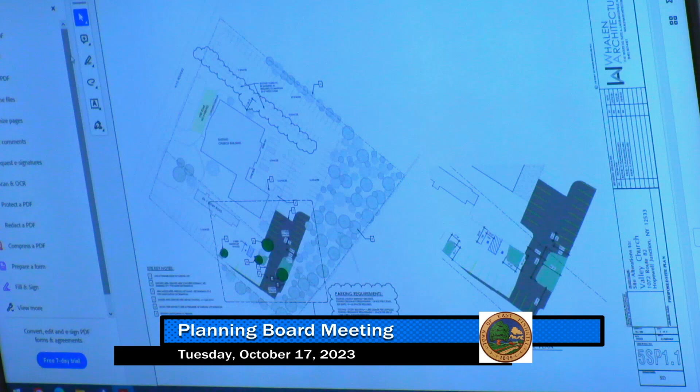While you're looking for things, I'd like to remind the board that at the last meeting we passed a motion to exercise our discretion to waive any requirements with regards to the front yard setback unless determined by counsel that that was inappropriate. Counsel actually determined it was appropriate, so this particular project does not need to go to the zoning board. There are no other issues to deal with on that. Thank you.

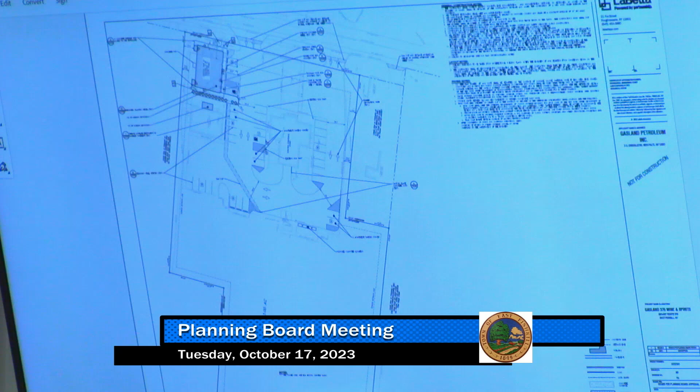That's pretty much where we are now. As I mentioned, some of the items we're still working to address, such as the lighting, and we'll be providing that in the next submission package.

At the last meeting, you guys declared your intent to be lead agency, and the applicant circulated, but it hasn't been quite 30 days yet, so I think we'll hold off until the next meeting before we declare lead agency. I believe you were referred to the ARC at the last meeting, so you've got an upcoming meeting on November 2nd. I don't think a submission has been made.

I've spoken with the architect who is preparing for that meeting and has submitted, or will be submitting, for the one after. I think that's due next week or the following week. So you should circle back with the planning office and speak with Jeannie Burke, and she'll give you the dates and the requirements for that meeting.

Thank you. And since it was not circulated, at this time the public hearing for the Architectural Review Council is done through us. So you'll be providing us with elevations and renderings at the next meeting. You need to bring those to the next meeting.

Yes. Okay, where are you with the health department with regard to septic? The septic had been previously approved for this expansion. The project had gotten a building approval and a health department approval to put apartments above the existing convenience store. At the time of that approval, they had designed it with the capacity for potential development of the liquor store, the proposed liquor store building. So as far as the sizing of the system, it is adequately sized.

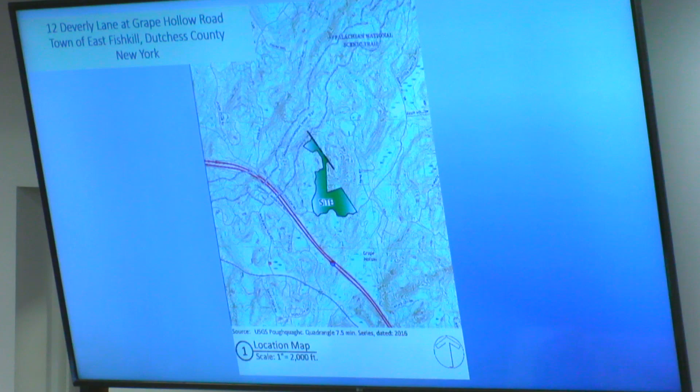Last time we were here was January 17th for the sketch plan review, and just to recap, the property is located off Grape Hollow Road. It is situated in the East of Hudson watershed.

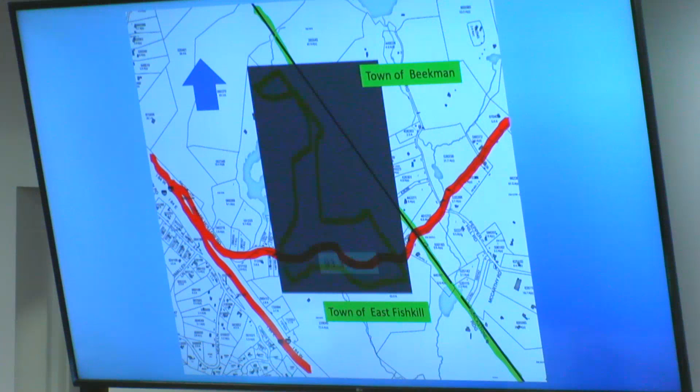The boundary line between town of Beekman and town of East Fishkill is adjacent to the property, and the red line represents Grape Hollow Road, which is a local road. And this line is I-84. The lot area is 93.3 acres.

The applicant owns properties surrounding the property. One is in town of East Fishkill, 19 acres, and 2 of them are in Beekman, almost 42 acres and 1.4 acre.

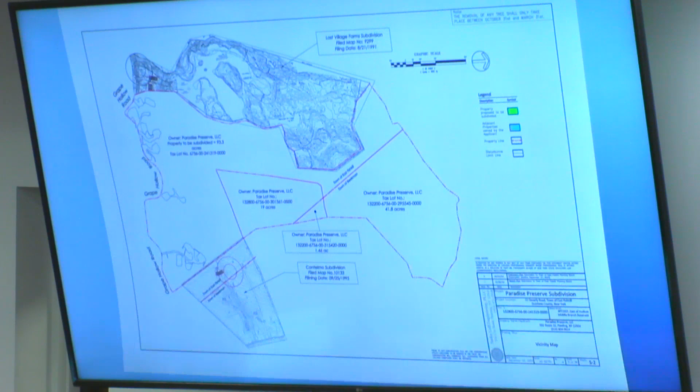So the property which is to be subdivided is shown in green, and the property also owned by the owner is in blue. The property is surrounded by 2 subdivisions. One, I believe, is partially constructed - that's the Contelmo subdivision - and the other one, I believe, is not fully built - that's the Lost Village Farms subdivision.

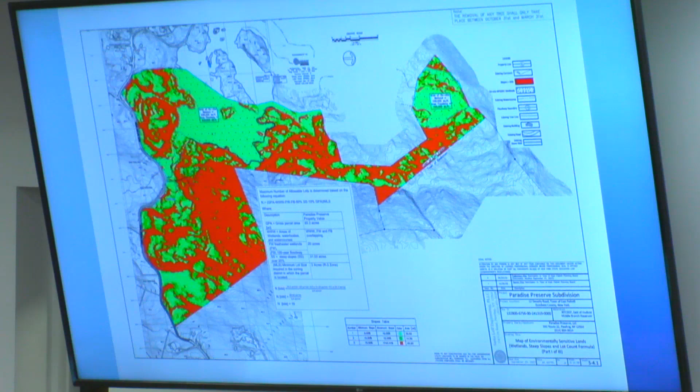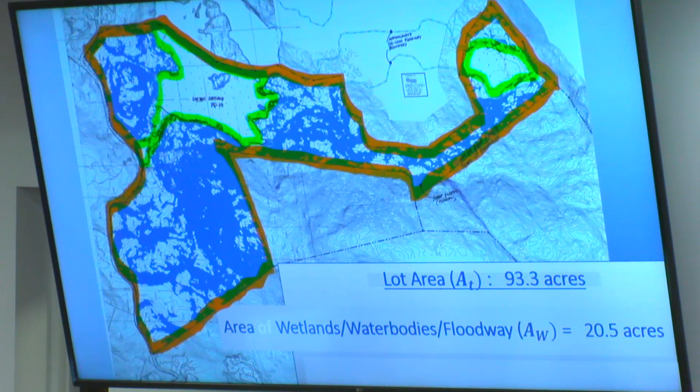We have wetlands, floodways, water bodies overlapping each other, which is about 20.5 acres. Steep slopes are 31 acres.

And based on the formula which is listed in the town code for computing number of lots, the formula yields 16 theoretical lots, which is more than the six lots being proposed.

The property is zoned R3 residential, and this is from the zoning map, town of East Fishkill.

The property use history was obtained from the town of East Fishkill property cards, and the codes were obtained from the assessment manuals.

So prior to 1986, it was listed as camps, cottages, bungalows, seasonal residences, one-family year-round residence, and current property use is residential multi-purpose, multi-structure property.

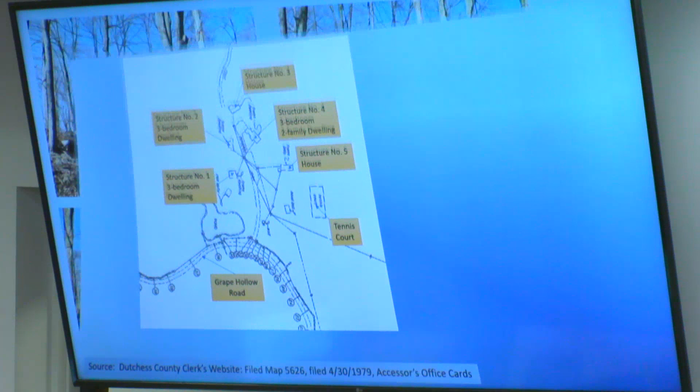Those buildings were built in the late 1930s, early 1940s, and they do not have any historical value.

I know last time you asked me about that, and since we got a letter from the Office of Historic Preservation, I know there is floating thinking that this used to be a Girl Scout camp, but I was unable to find anything regarding that, and went back to the late 1800s for ownership, and it was always owned by individuals, or there was some company, Kingston Holdings, but I don't know what.

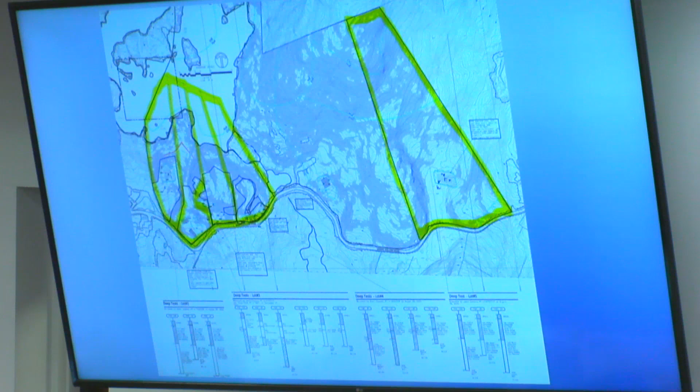So the subdivision is into 6 lots. We have the part which kind of governs the subdivision - the availability of area for subsurface disposal systems.

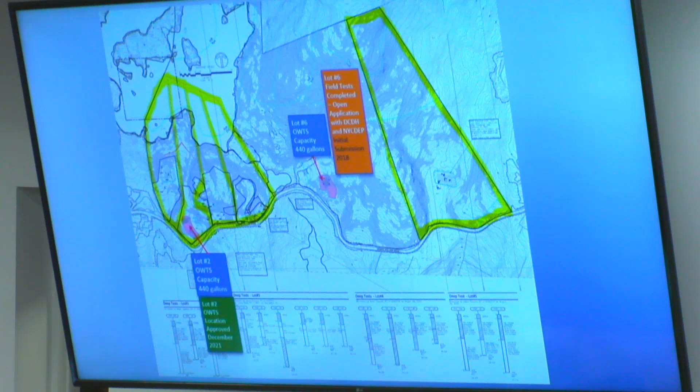In 2021, the owner obtained a permit for a septic system for 440 gallons, which happens to fall on lot number 2. And in 2018, there was an application submitted to the health department for also a 440 gallon system, which falls now on lot number 6.

Then we have lot number 5, where the design capacity is 550 gallons. And the plans for the subdivision, basically the same plans we submitted to you, were sent to the Dutchess County Health Department.

Then we have lot number 4, which has capacity also 440 gallons. Lot number 1, 330 gallons capacity. And lot number 3, 220 gallons capacity.

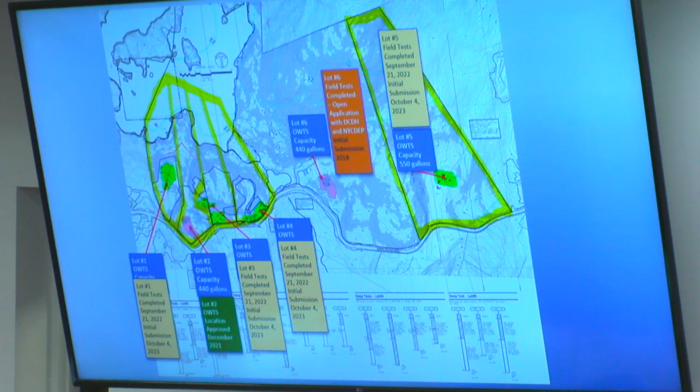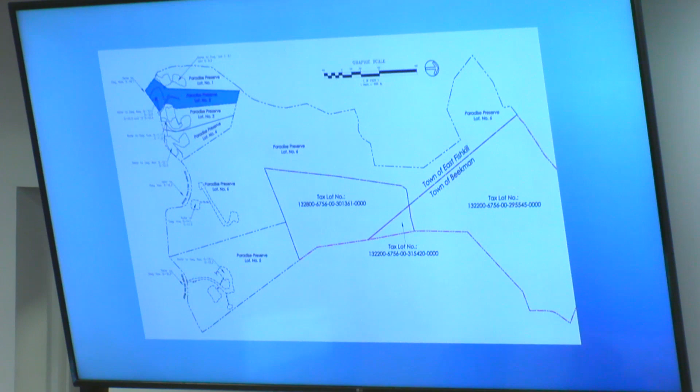For lot number 2, the driveway length is 120 feet. That's - I'm pointing that out for the fire department comments that any driveway over 1,000 feet has to have a pull over.

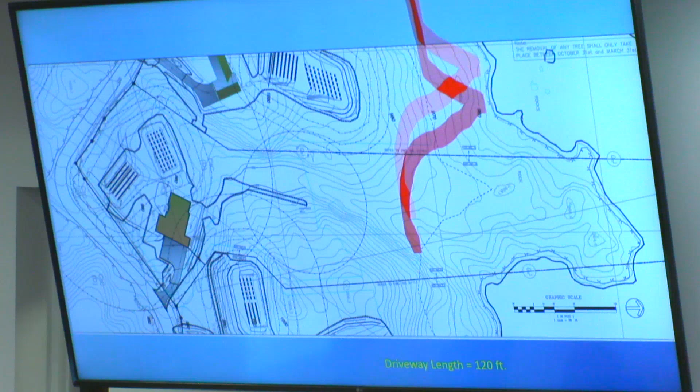Again, we are away from the 100-foot wetland buffer.

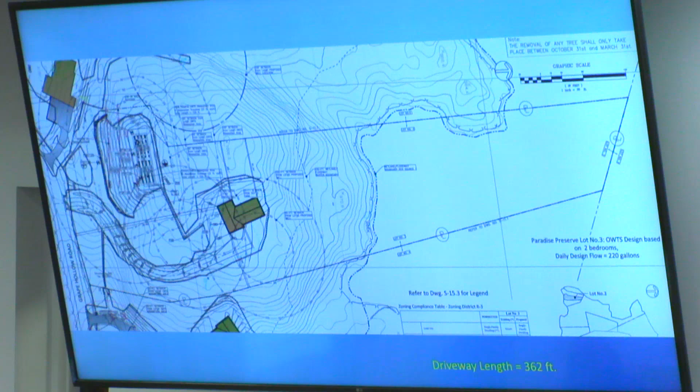This one is lot number 3. Driveway length is 362 feet. And again, this is the 100-foot wetland buffer area.

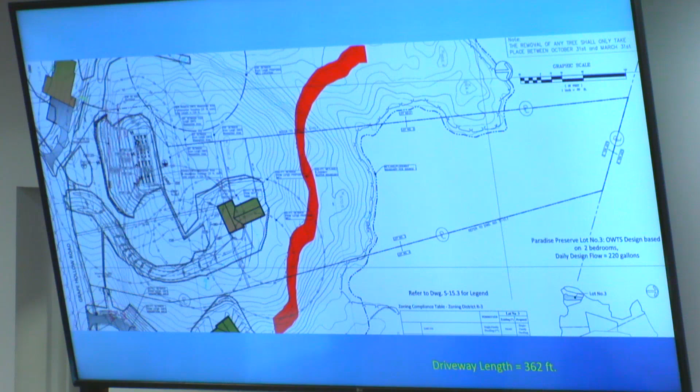The wetland portion of the wetland was delineated by wetland scientist, Mr. Kozlowski, because we were concerned about the proximity at this area. So he put the flags on the edge of the wetland, and that was surveyed by the surveyor, field survey.

You have lot number 5. This is where the driveway is exceeding the 1,000 feet. Initially thought that the pull over area would be as highlighted in green, but if it's supposed to be by half distance, then it would be somewhere where the blue circle is.

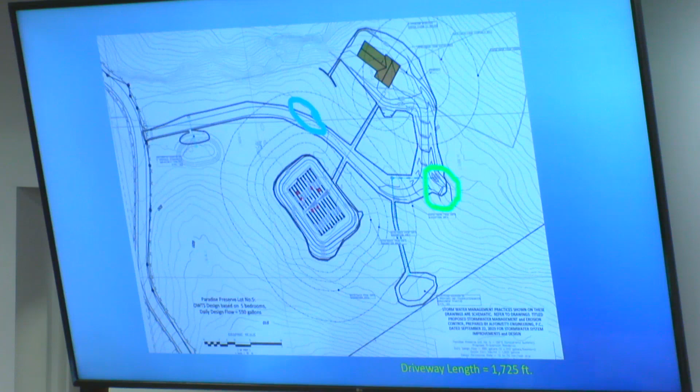And the last is lot number 6. That's the largest lot, around 61 acres. And this is the proposed development. The 100-foot buffer appears to skim over the existing driveway or its lane.

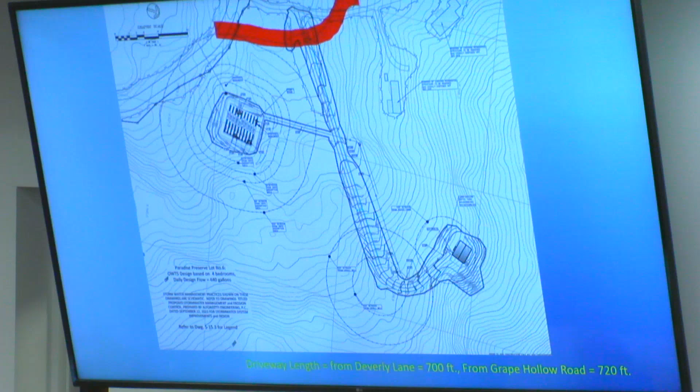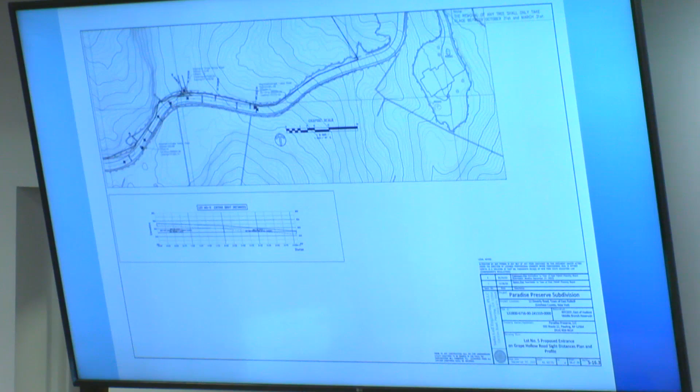We look at the sight distances for the proposed driveways. So we created the plan and profile showing how the sight distances were determined, and actually we met in the field with the highway superintendent — I'm sorry, I forgot your name. Yes, we met at the property to look at a couple of the driveways.

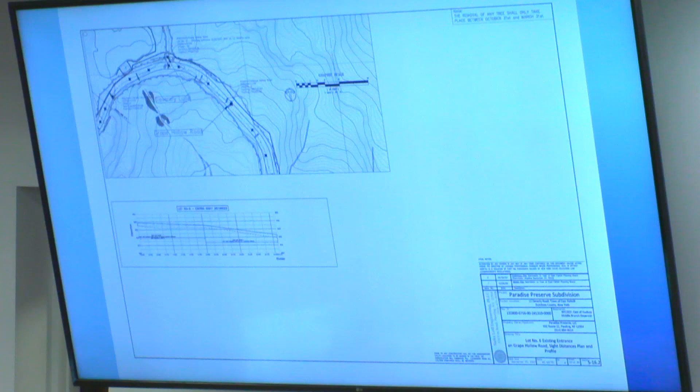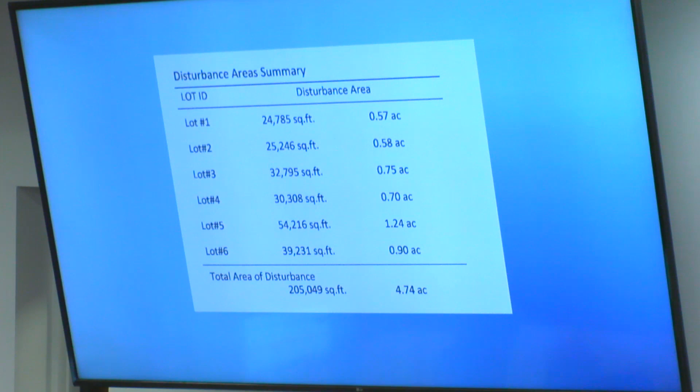We have area based on the plans which were presented. We determined the area of disturbance of each lot and combined the total to be 4.74 acres. I understand there is a concern that may exceed 5 acres if we do some improvements — maybe the pullover or whatever will kick it over 5 acres — and we will take a look at it, and if necessary we would address the condition of the total area disturbance being 5 acres.

This light green line represents a ridge line where the stormwater runoff from Lot 5 would be directed to Stump Pond stream, and stormwater runoff from Lots 1, 2, 3, and 4, which is about in this area, would continue going to PQ 23. Lot number 6 runoff is split between going towards PQ 23 and PQ 22.

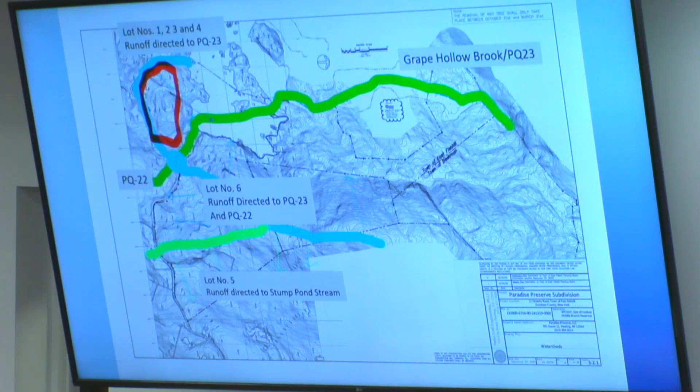And with that, the stormwater management and erosion control — Lauren Brennan of Alfonsetti Engineering will guide you through that. Thank you very much. Thank you.

Hi, good evening, I'm Lauren from Alfonsetti Engineering. I'm here to answer any questions regarding the stormwater design for the proposed subdivision. I just want to say that when we submitted, we only included a stormwater report for Lot 5, which was over an acre disturbance. Our thought process was that each lot is going to be developed separately, but as the engineer pointed out, the overall disturbance is going to be around 5 acres, so we're going to have to speak with the client to see what our next options are to try to keep that under 5 acres disturbance.

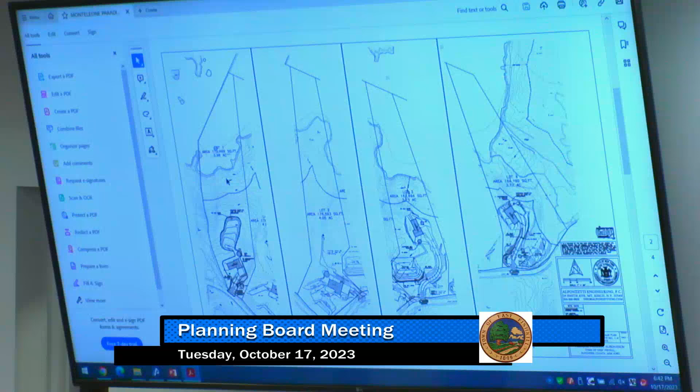And there's additional requirements in the East of Hudson — it requires enhanced phosphorus removal. It's a difference in the calculations, but essentially all of the lots are going to be required to be treated in some fashion in order to comply with the Phase 2 regulations for DEC. Also, they had provided a letter from DEP dated earlier this year, referencing a plan depicting less than 5 acres disturbance. Now, whether it's 4.9 or 5.1, I don't know what the DEP requires if it exceeds 5 acres, but that letter may need to be revisited once they revise their plans and address all the additional requirements.

And we had a number of comments regarding driveways, things like that. Several of the lots appear to have drainage piping going from one lot to the next. We try to keep it in the same lot, but I think for lot 1 and 2, there's a pond that's very close to the lot line — Yeah, Lot 1 is piped across to Lot 2, and 3 goes to 4. All of those are going to require some form of easement or a stormwater management district to handle all that.

So I just wanted to bring that to the board's attention. Being in the East Hudson watershed, it's a whole new ballgame in terms of the minimum requirements. Normally, if you exceed 1 acre, you have to get coverage under the permit. If you exceed 5 acres, you have to do a full SWPPP, or if it's commercial. Here, the threshold is a lot lower, and every lot will need some form of treatment to meet the requirements. Got it. Thank you.

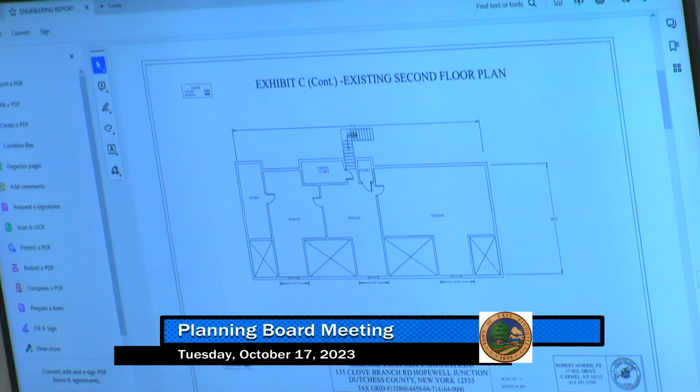Good evening everybody, my name is Camille Niles, I am with Sallard Property Group. I am looking to convert my storage space on my whole second floor at 135 Clove Branch Road into office space, looking to have a site plan amendment. With that, I know I would need to upgrade my parking, so I have a proposed site plan revision for my parking lot. Right now I have 27 spaces, 2 of which are handicap and 1 which is van accessible, and I know I'm going to need to provide 4 handicap spaces with 1 van accessible.

So my current tenant, ABC Speech Therapy, is in need of additional space. As of now, I'm in talks with them for the upstairs. So as you can see right now, the layout I have for the existing floor plan, it's just storage space. There's stairs in the back to go up, and there's a back entrance, which I'll show you in a moment.

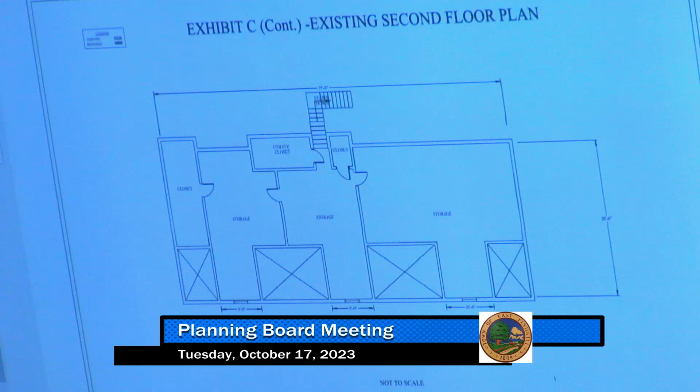So basically, I'd like to be able to rent it out, whether it's to them or to another office-type business. Their type of business would be the worst-case scenario, to make sure that I have sufficient parking. So that's why I'm using them as a business model. If they choose to take it, this would be the worst-case scenario, as in the amount of therapists and clients and stuff like that.

So I figured I'd just go through with it, see where it takes. If they don't take it, it would be on a much smaller scale. It's just because they're currently my tenant, and I do have the additional space, it's just storage right now. So right now on the screen is what it looks like upstairs right now. It's just 2 out of the 3 rooms are sheetrocked, and I'm just looking to finish off that space. And I'll show you my parking.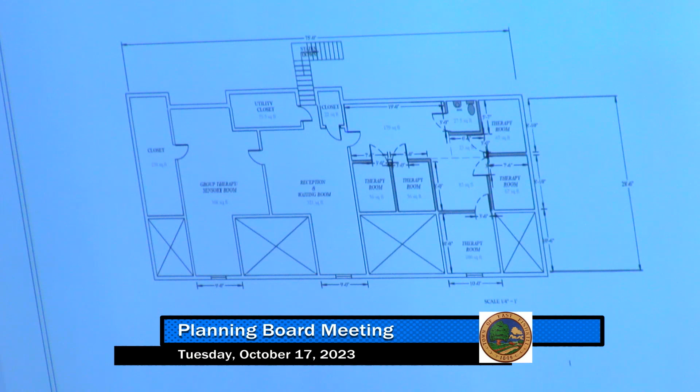So this is the existing parking I have right now. I have 27 spaces. Defined by the code, I would need 28 spaces, which if we were to use the upstairs for this business model for ABC.

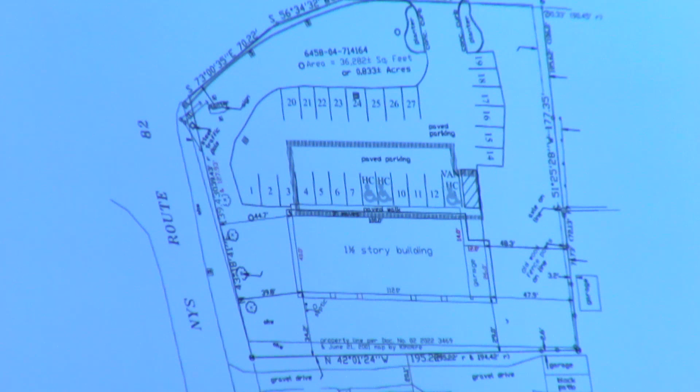And the proposed plan is the parking, I would need to modify some of the parking lot to make that extra space. In the event that ABC doesn't take the upstairs, I am aware I need to provide 2 additional parking spaces because it's a different business. So I'm aware of that as well, and I would present that to the board if need be. So this is the model for ABC, but I am aware I would need to provide 2 more.

So if anybody has any questions or comments, my engineer could not be here tonight, Robert Morris from Morris Engineering, but anything I can answer, I'll present to him.

How crowded is the current parking lot?

Well, I'm going to be very clearly honest with you. ABC is expanding as we speak. So right now, they are aware it's either they take the upstairs or they find a second location. So they went from the small little space and they just grew. So I am monitoring everything to see how the tenants fit, because the last thing you want is not to have a parking spot for a client. So the program they're looking to do upstairs is a drop-off program. It's a little bit more detailed than what they're doing now. They're doing small group sessions, but they're looking to do 2-hour group sessions, drop-off, pick-up type thing.

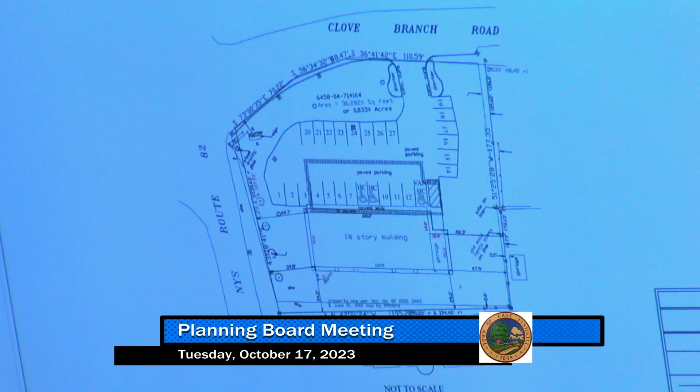This would 100% be the worst-case scenario, meaning another type of business. I think the gist of that question was more around, if fire trucks or an ambulance had to come in, is your parking lot, is the new parking lot going to be equipped to handle that?

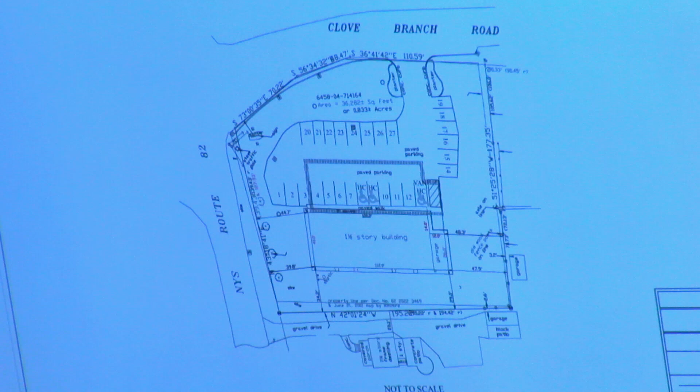Well, it would probably be the way it is now, that you pull up in front of the hatch, in front of the garage, the van accessible hatch, because I don't have a fire lane in there. If that's what you're looking for, I don't have a fire lane in there, and it would definitely be, you pull up and then there's 4 doors.

Is the space accessible only through an interior stair? Is there an exterior stair? It's only interior, which I'm going to show you. That's in the back? It's in the back. There's a gravel walkway, it's not paved, on the side of the building.

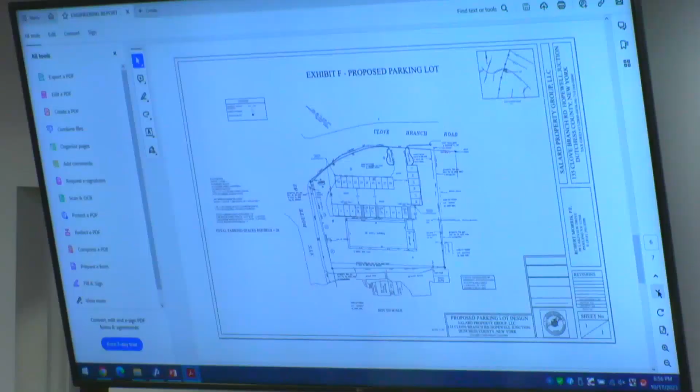I actually have, I don't know if I can bring up the picture. And it would be through, the staircase is in the back of Unit 3, and it's closed off, there's a door closed off so that the physical therapy is still private, and there's a staircase to go up to the 2nd floor.

The drawing you show now is for more physical therapy space upstairs, as the plan right now? Physical therapy, no, they're just downstairs. Oh, okay. So right now, the whole entire upstairs is just storage. No, but the change, the new plan is for more office space upstairs? For ABC Speech Therapy. Oh, okay. Yeah, not for the physical therapy. Yeah, so it would be for the speech.

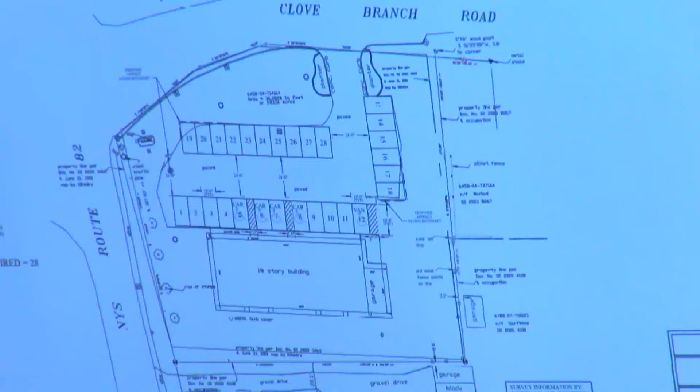Jackie, I don't know how to get out of this to go back to the image. I'm just trying to get the picture. I have a picture in here of what it looks like around the back of the building. Sorry, Michelle, I can't.

Entrance out to a small pad, which in the winter was never taken care of. Yeah, now you're gonna have— there should be three other files on here.

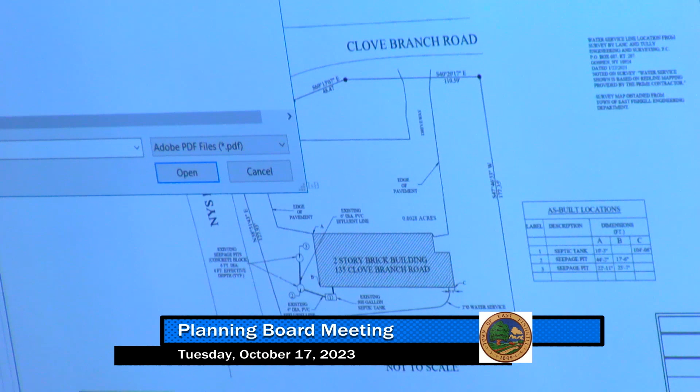Oh, I think we have to hit open. Sorry about that.

Okay, all right. I'll provide more information on that, but there is access, a separate door to get to the back of the building for the office.

So do you have plans to change the way that you access it? Like, are you gonna take down trees? Is there enough room to walk there? Yes, there's enough room. There's a 5-foot gravel path around the back of the building, and there's lights behind the building to get to it. So it's all cleared.

Is that going to be ADA accessible? So are you going to need to repave that space? Well, it is on the 2nd floor, so it won't be ADA accessible from the parking lot if you're asking if there's going to be a ramp, but to get to the 2nd floor there's an existing staircase, so it's kind of what's there.

I don't know, I would refer to the code to see if— I thought it was for the 3rd floor that would be an issue. I'll maybe ask Matt on this, but my understanding is, correct me if I'm wrong, if it's an existing business that has access to a 1st floor and they're using a 2nd floor, it's okay because the folks going there can access the 1st floor. But if it's a different business that goes into the 2nd floor, then they have to have ADA accessibility. I believe that's the rule.

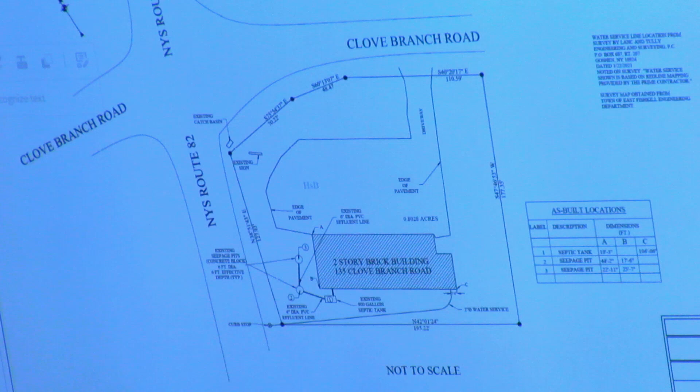So do I understand they do meet our parking requirements, notwithstanding the fact that reality is otherwise, the fact that it's already pretty tight, and it will be tighter with the addition of the office space?

Well, it would be managed differently because they're going to have the program, I believe it's two 2-hour sessions, one in the morning, one in the afternoon, to use the space upstairs. It would be managed differently. The downstairs is strictly parents could stay, because they technically have the 2 spots in front of their space right now. And because they grew, it wouldn't be much more than what we have now, but it would be managed differently to accommodate whatever programs they're doing.

So to clarify, a different user that might come in would be a change of use that would actually require it to come back to this planning board, or not?

If there was a new user downstairs, for sure, they would have to come back as a change of use. Although if it was a similar use, they might not have to, and they might be able to go right into the building department. The code was amended in the past year or so, so if there was a new use that was less intense than the existing use, then they may not have to come back. It would all depend on the type of new use.

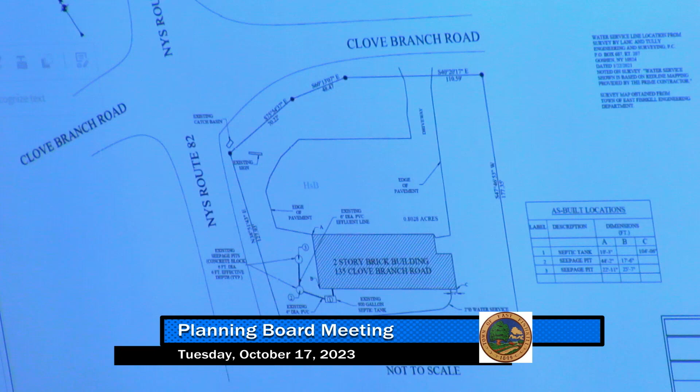And like I said, this is going towards the worst, meaning what you see is them expanding as we speak, because the school year started. So I don't know how deep they're in right now. I know they're trying to juggle and find, and you know, they're looking for me to provide extra space. But if they're at their max right now, then this would be the scenario. But they are looking around actively. They know that this is a little bit of a long road because of permits and renovation, so that we have to factor too, timeframes. You know, that can mean a lot for the school.

All right, so let's speak with the traffic engineer, and then I'll get back to you about what next steps would be. Perfect, great, excellent. And so at this point no action is necessary? No, I think we need to get some more information before we can... So thank you very much for your presentation.

Thank you. Is there any other business to be brought before the planning board for this evening? They're back. Looks like they're back. Okay, so we've got Paradise Preserve subdivision. Did you have additional information you wanted to present? Well, I guess more questions.

We discussed the project in the lobby, and whatever would be lying ahead for the project and what would have to be done. And the applicant is considering reducing the number of lots. Instead of developing into 6 lots, the property would be 4 lots. That's what we very quickly discussed in the lobby. So I was wondering, would that change anything today, what was done as far as the lead agency?